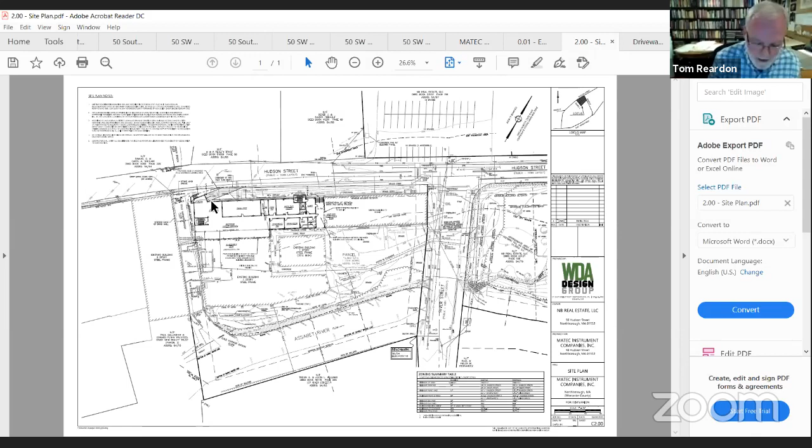What we're proposing to take down, if I can show you some photographs. Tom, I also have, I don't know if this is helpful. Or if you want to go through—there are 3 pages that you sent us.

Some viewers might not be familiar with the building. If I hold these up, the brick building is remaining, and the blue portion of the building is being demolished. The first floor is about 4 to 5 feet below grade at Hudson Street, so what you see from the street is 1.5 stories, but there's a 2.5 story section at the far end of the building. There's also a portion of the building that's 3 stories, about a third of the existing structure.

Are you able to use the annotate function in Zoom? It would be helpful if you could highlight or point out what you're talking about. At the top where it says view options, click annotate, or you can request remote control to use your mouse. He's not going to have the ability to do that unless Kathy gives him access.

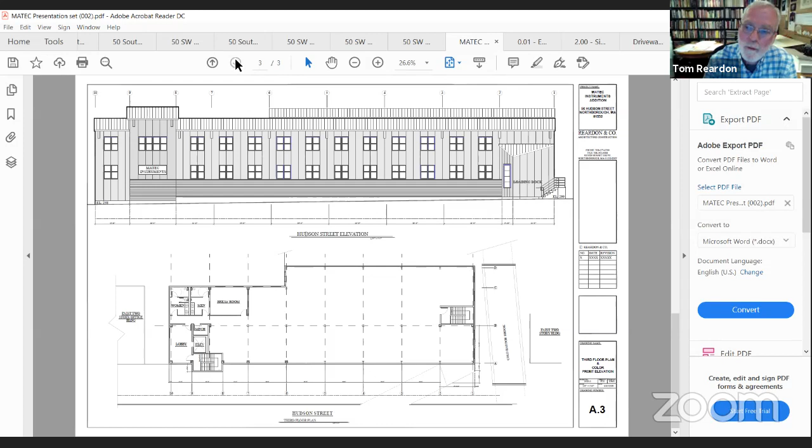Is the building required to be accessible on the exterior? Well, it is an accessible building, and we will have an elevator, and we're going to have handicap accessible restrooms on each floor, but it's accessible from the rear because the grade change takes - right, we're a half a flight down from the roadway. Right, okay, so we're coming in from what you'd consider the back.

So any questions for us?

Hi, Lisa Maselli. Just a quick question on the loading dock - now that you're putting it at an angle coming into the building, so it's easier to access, how much grass area are you losing there? Well, if you can see from this photograph, there's about a patch of 7 to 8 foot wide grass between the building and the sidewalk. So I don't know, 150 square feet, 200 square feet of grass.

Because if you're looking at the lower schematic at the angle that comes out, it looks like it would take at least 3 of those blocks for the vehicle to be able to back in and out. Is that correct if I'm looking at that? So it almost looks like it takes off half the grass?

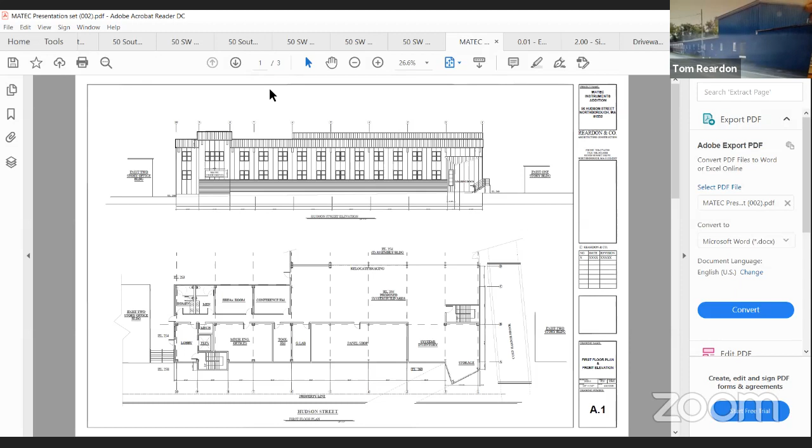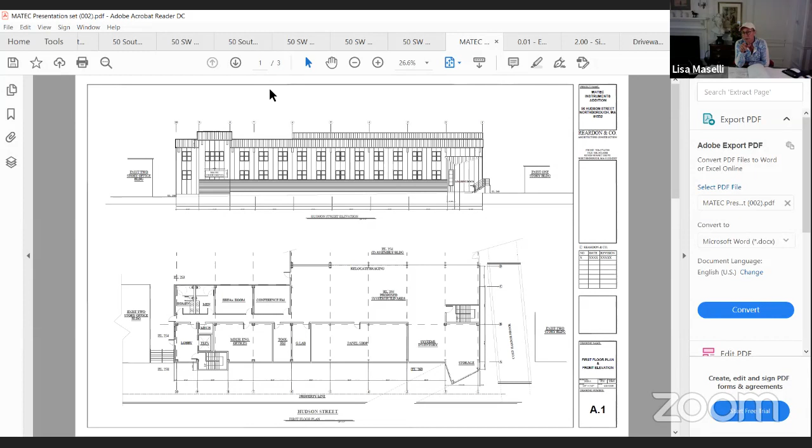Right, but that's straight on, where this is coming at an angle. So you don't lose - I mean, my only concern, the building is fine, but my concern is when you're walking on Hudson Street, that you don't have a lot of space to walk on that sidewalk. You almost rely a little bit on that grass area in case it fell over or something, you know what I'm saying? It's quite a busy street, and you have to cross over after this building, or in the middle of this building, to the other side by where the waterfall is.

Well, there's paving all the way from River Street till Cold Harbor Brook on this side, correct? Can we look at the existing site plan? Is that possible? Yep, thanks, you might have to zoom in to that area.

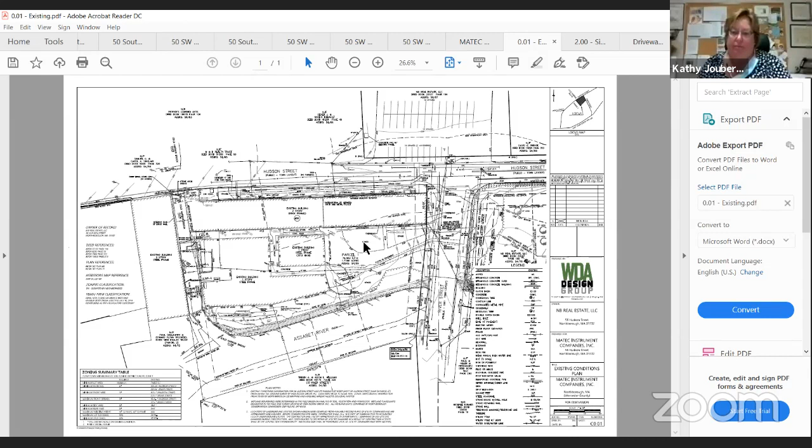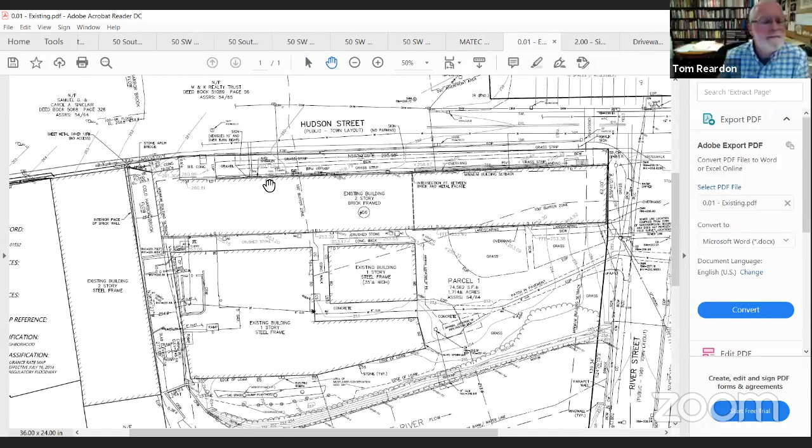Can you zoom in on that area, Kathy? On the left, yeah. Okay, right there. Yeah, wait a minute now. Oh. Now you're there, that's yeah, good. That's good. I can't get in any farther. I don't know why, but I can't get in any farther. That's okay, that's helpful. Yeah, so again, we're talking about right there.

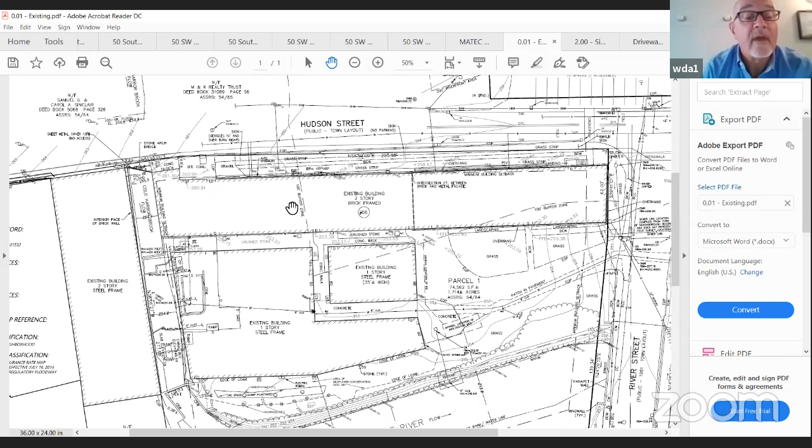Right, so from Cold Harbor Brook, it's paved from the edge of the Cold Harbor Brook. Then you have another section right in front of the loading dock, and then you have another gravel patch, and then before you get to the telephone pole, the sidewalk. So that's the area where we're proposing to put the new driveway.

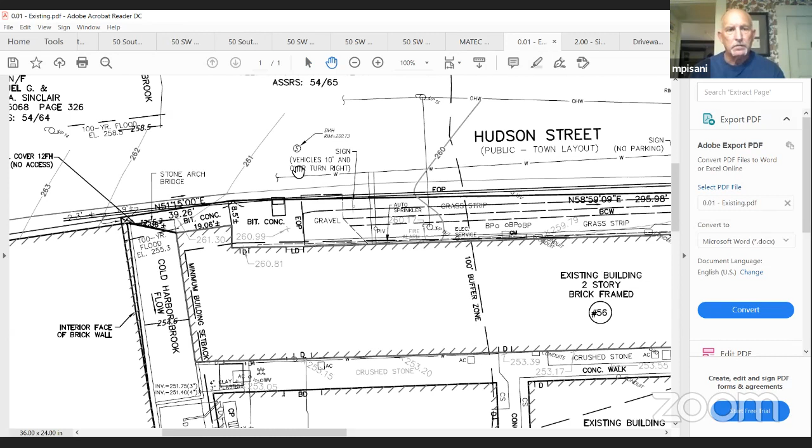Perfect. Now, can you kind of show me where the crosswalk is? Well, it's right at the edge of the roadway. There's, see the double line? That's a curb.

But where- Lisa, yes, I think in order for us to hear you, you're gonna have to move closer to your microphone. Let me see if I can - I'm not gonna be in the, but let me just let me look at it from here.

So if I'm looking at this map, I see 39.26 feet in the left-hand corner, it says bit concrete. I'm assuming that's from there, if you went west, that's where the crosswalk starts, from there over to the other side where the brook is, or where the waterfall is.

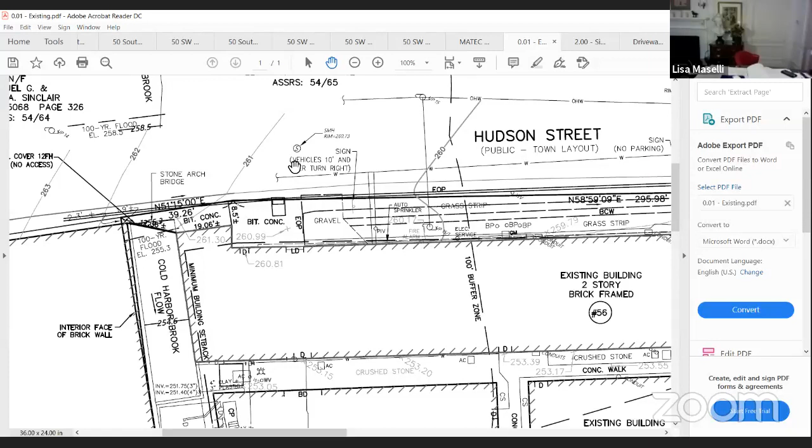The former waterfall - it's not there anymore. There's some concrete, but no waterfall. The pond is emptied, the pond is empty. Is that going to come back? No, the dam deteriorated.

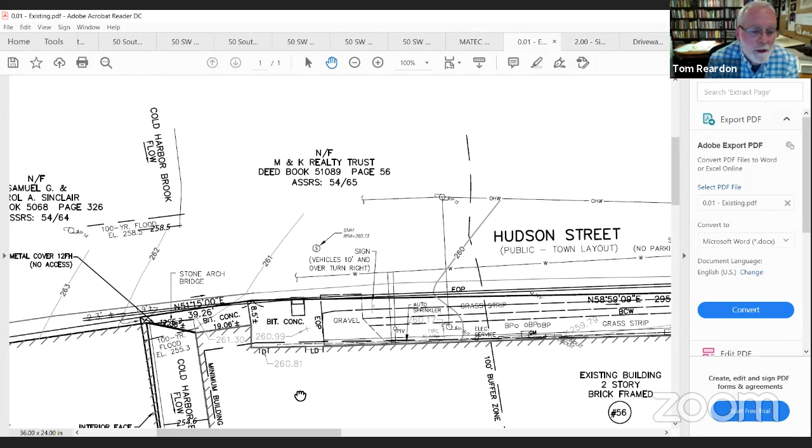So I've always wondered, how does the water go under the building and then take a 90-degree turn to go down to the other area? Well, there's a large concrete plank deck over Cold Harbor Brook that spans between the MATEC building and the building on the other side of the brook. You can see it on this drawing here, where it says invert 251.75 - that's the end of the concrete plank or cap.

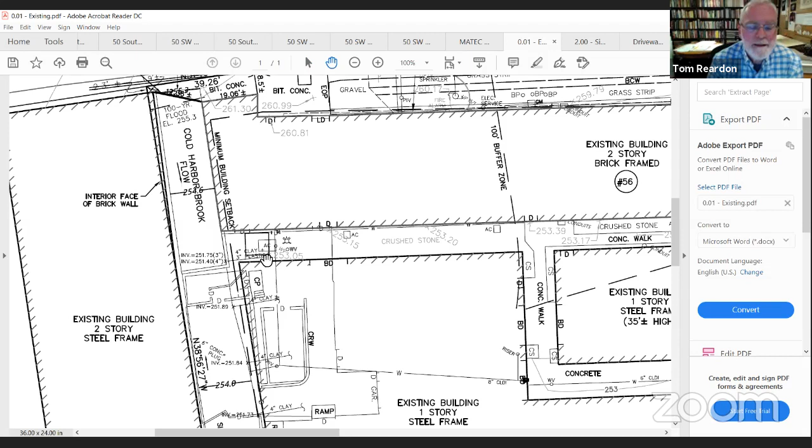But our new building is pulling away from that. Oh, so it won't be on top of it at all? No, we're pulling back about 15 to 20 feet, going to the right. Well, that's a good idea.

That's my only thought, that it's hard to walk there safely in the grass we have in front of the building. It's not a lot, but it's nice to have that buffer. Well, there will be more grass because we're eliminating two sections of bituminous concrete and one section of gravel. And you'll be able to put the sidewalk back, with a diagonal 30-foot long access to the new loading dock.

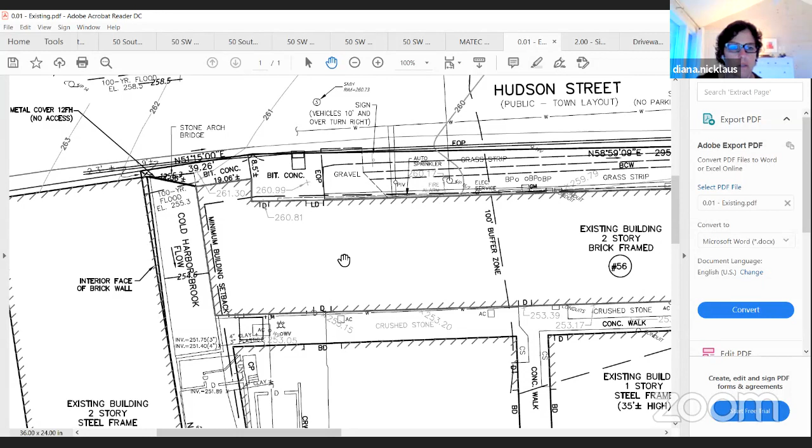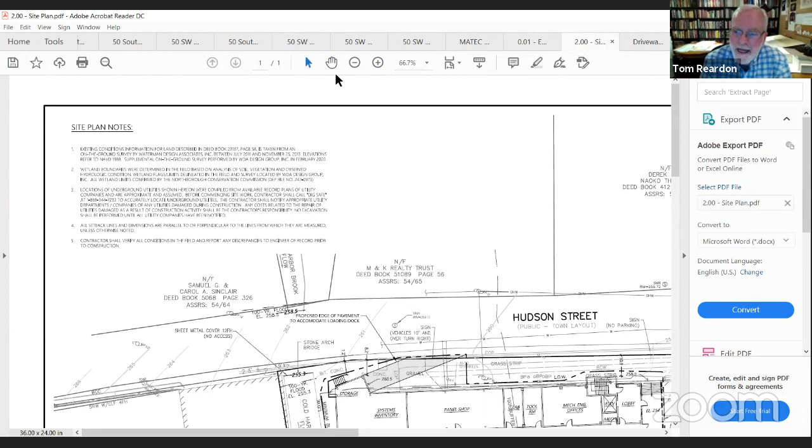I had another question about the loading dock area on your elevation. Is there some kind of bumper beneath the opening at the dock? Yeah, there'll probably be a rubber bumper. The loading dock floor is level with the second floor of the proposed building.

Tom, in your presentation, which was done well, you pointed out the lighting, any additional lighting you'd be having on the site. You pointed out that you're not going to have signage, or it's going to be limited signage right around one of the entry points. On the elevation, it showed a small signboard at the bump out on the right side where the stairwell is.

And we would obviously permit that as a sign permit. And that's the only one - a wall sign, no ground sign.

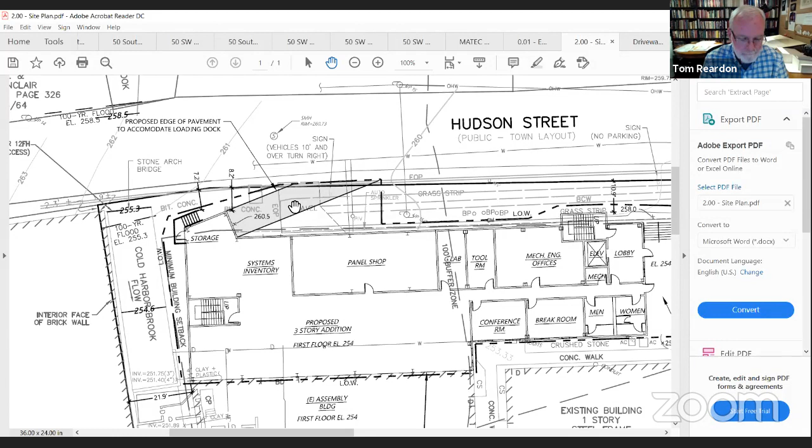Okay, Lisa, do you have any comments? It's fine, I like it, I don't think there's anything else we can do with what he's done with the roadside. So no, I think it's fine. I like the colors, and have at it. Lisa said she liked the colors, and she's good with it. Okay, and have at it, she said.

Okay, so Kathy, do we need to do a vote at all on this? Well, some indication, I'll send you a draft memo, but just a vote tonight, if you're ready, saying that you agree with the materials in the site plan as presented, something to that effect. My understanding is that you're not looking for them to come back to you. No, right, that's true.

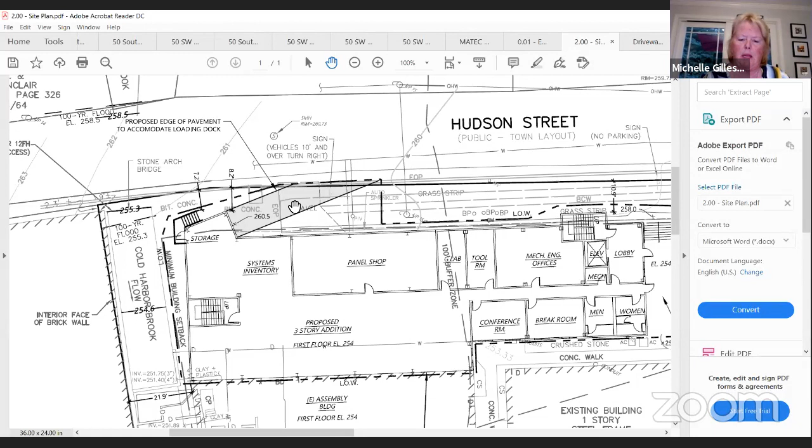Okay, so let's do a roll call vote, everyone can say yes or no. The vote will go that we all agree with the materials and site plans presented by the applicant here tonight. These will then be forwarded on to the ZBA as they're going before the ZBA in October. So having said that, Dave, do you agree? I agree. Approve? Approve. Thank you. Lisa?

Lisa agrees and approves. Diana? Agree, approve. And I agree and approve. So thank you to the applicant, we appreciate it.

It's going to be a good looking building. I like the colors. You're all set, on to your next board. Thank you very much.

So the time now is 6:50 p.m. and we have 50 Southwest Cutoff as our next applicant. That would be James Tatro, Tim Shea, and Nick Muskoff, is that correct? Okay, and they will be added on.

I do not know which one Mr. Shea is. I have four phones left and no identifying info on any of them. Once Nick connects, we can ask him which phone is Tim Shea's.

Hey Nick, can you unmute and let us know which phone number belongs to Tim Shea? Because we don't see his name, we just see phone numbers and don't know which one is Tim's. What's the last two numbers of his? 2131.

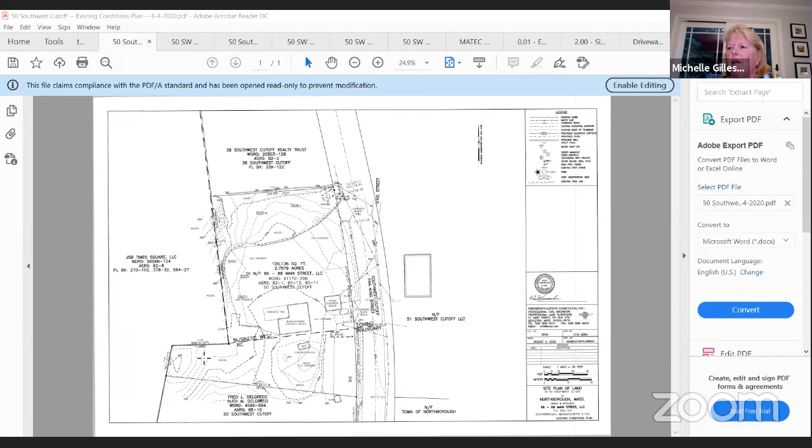And 531 seems to be twice, which seems to be James up there. Okay James, we can see your phone, but not your face, so if you want to start presenting.

Sure, yep. The application in front of you is for 50 Southwest Cutoff, which was formerly Del Greco Masonry Supply. The site is on the west side of Route 20, almost opposite where King Street's upper intersection meets it.

It is bordered to the north side by number 38 Southwest Cutoff, a commercial leasing space that the applicants also own. There is wooded land behind it, and you have to go about 600 feet behind this property to get to the homes on Buck Hill Road.

And to the south is a residential lot still owned by the Del Greco family. On the opposite side of the street is the Cromaro Tarpaulin Company. So that's to give you some idea of the context.

The site has been used by Del Greco, and part of it is paved, with a small structure up front and a bigger building in back where I guess they used to shape blocks and things.

Although most of the blocks and stuff is off the site, what the applicant wants to do is take advantage of the previous use to grandfather in the contractor yard use, and construct two buildings: one of 7,000 square feet, more northerly, and a larger one of 9,600 square feet facing the road. These two buildings would be used by contractor yard businesses - electrical, plumbers, people making tiles, things of this sort. That's their experience at their property in Sterling, which was built similarly.

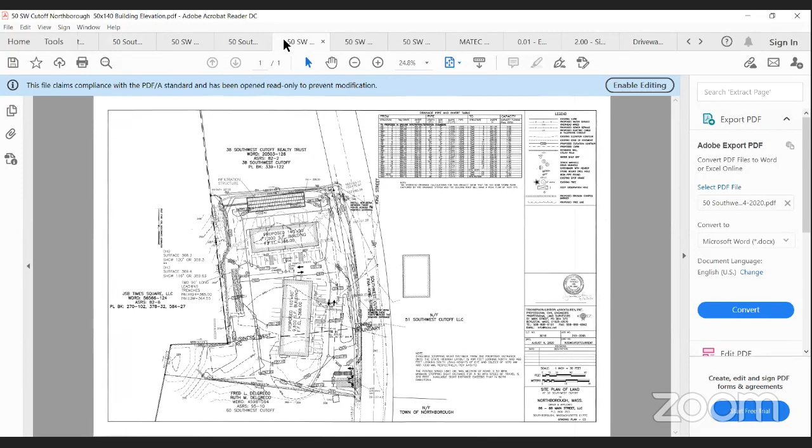If you look at the colored landscape plan, for the 7,000 square foot building, the more northerly of the two, we've got planting along the corner of the property and along Route 20 to shield the view of the back of that. For the larger building, the 9,600 square foot one, the back of it would be out of view. So the other primary focus of the landscaping is to shield that building and its activities from the Del Greco residents immediately to the south.

We're going to take the land in front of this, the rise off of the Route 20 curb, and flatten it out a little. It's mostly about a 2-to-1 slope, and we're going to flatten it out to 3-to-1. We're going to make most of that lawn.

I wanted to also point out that right now there are two entrances onto Route 20 from this property - one up by the north end of the frontage opposite King Street, and one on that landscaping plan, almost opposite the word 'cutoff' by Southwest Cutoff. We're going to close both of those up and move to a single ingress and egress point right at the south end of the frontage, because that gets us the best sight distance.

We're going to have 4 lights proposed on site, besides some wall packs in front of each door, front and back of each of these units.

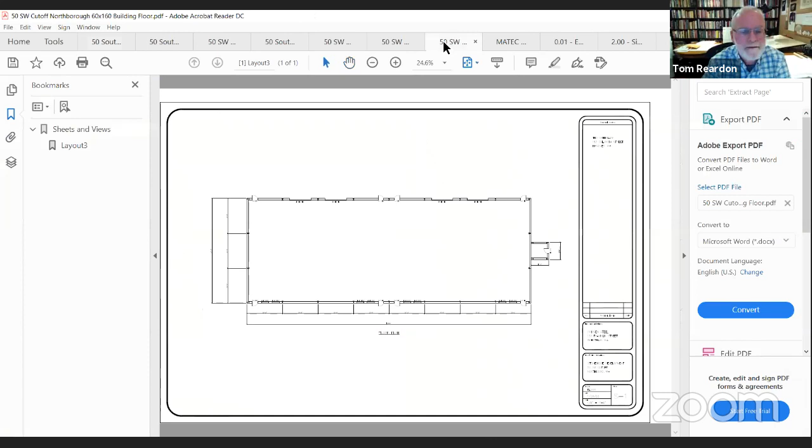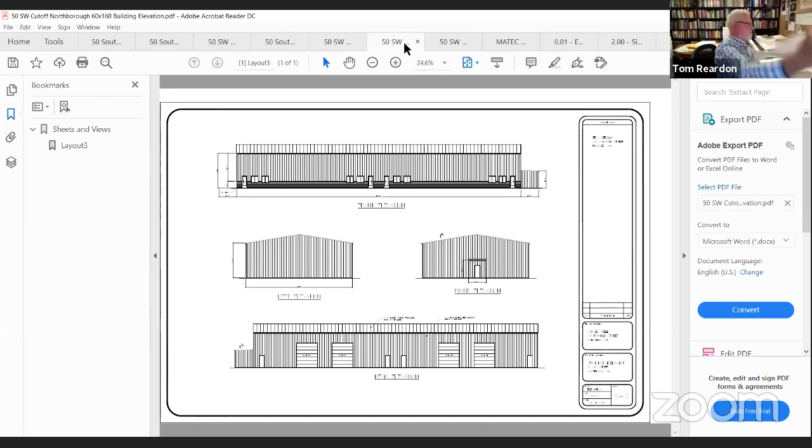Isn't it on there? On the floor plan, front elevation, on S2, yeah, that one right there. S2, we have two S2s. There's two buildings, one building is S1 and S2, and then a different building is also S1 and S2. I see, I get it, I had the wrong S2.

So those are the questions I have regarding the site plan. If anybody else, Diana? I would agree with your comments about that buffer with southwest cutoff. Are there a lot of trucks that would be coming in and out of that drive? I just wondered about the left-hand turn onto southwest cutoff as being a little tricky for trucks.

Well, if I may, that's why we made sure to move the entrance here. It's the single best spot for sight distance, because you can see a ways up towards the north. If you're sitting there waiting to turn, you can see. And in the other direction, a truck's driver would be much higher up, but we used the standard height of an object - the driver's eye is 42 inches high, the object is 51 inches high, in effect the roof line of a car. You could see, I believe it was Lexington Road coming in on the east side of Route 20, just downhill from here. I think you could see a vehicle there, which was enough for this 50-mile-an-hour speed. So it was pretty good.

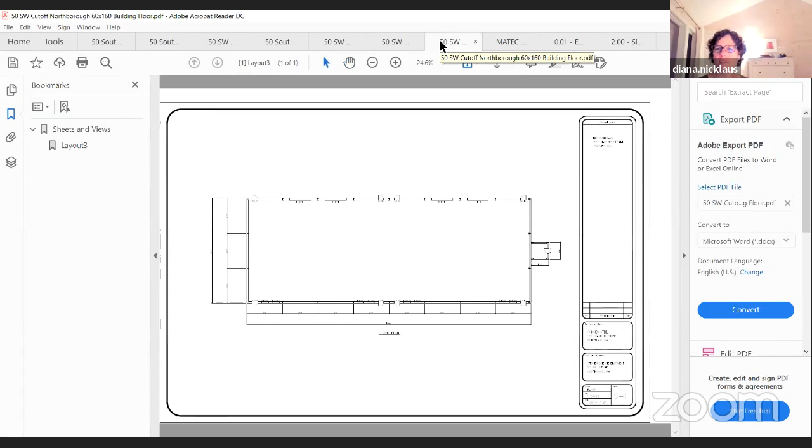Okay, so it sounds like you looked at that. I guess in terms of reviewing the site plan, it's helpful to see what the building floor plans are. And these are just steel drawings, right? Is it just literally wide open? They will be wide open spaces, yep. Like there's not even a restroom or anything in the building? No, they will have a single restroom in each unit. I mean, I guess I'm just accustomed to seeing floor plans when we're doing these design reviews, because I think it's important to understand the way the site is relating to the way the building functions.

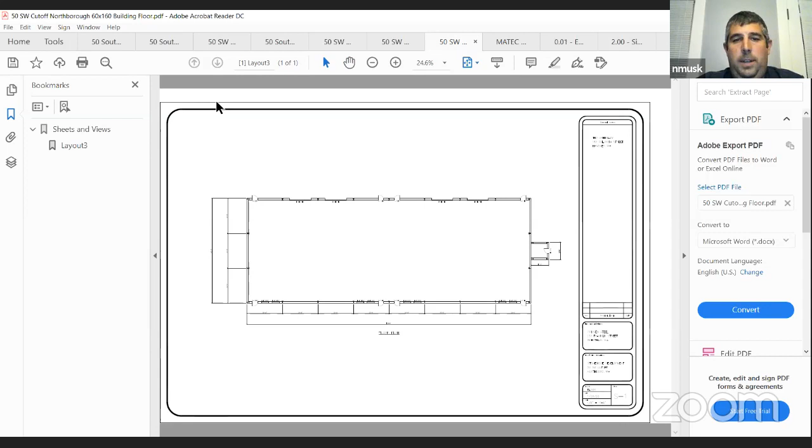The buildings will be designed to either be occupied by one tenant or up to 4 tenants per building. This is really just the building shell. And that's all you're going to permit it initially? It'll probably be permitted as 4 separate units, but this is our first design review meeting, so these are just our preliminary drawings. So you're going to show materials at a subsequent meeting? Material samples? Yes. Okay, that would be good.

So I think those were the only comments I had on the site plan. How about Dave? Okay, I got a lot. I agree with Tom, hands down. Coming into Northborough, you're coming past the Wegmans Plaza, you have the nice dental office, and then coming into this - the landscape design here needs a lot of work.

You're dealing with a large metal building in a sea of asphalt. The landscape that's been put in here needs a lot more thought because you're dealing with metal that gets hot in that sea of asphalt that gets incredibly hot. The plants have to try to survive after the first year in there in a very difficult environment. There has to be a lot of thought given to that, as well as long-term looks, since cars are going by here. We do need to kind of hide this without a doubt. Right now it's kind of like, hey, we have a splash of color or planting here, splash here, a couple in a row over here.

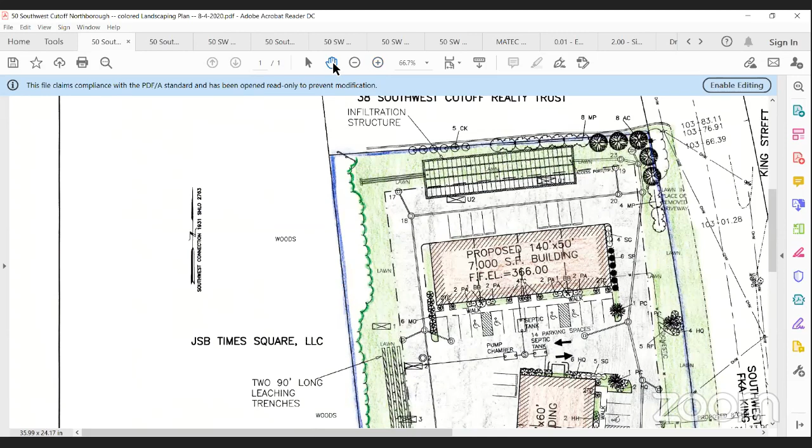Can I ask, I'm a little confused about something you just said - you mentioned about the left-hand side on the smaller building, and I'm not sure what you were saying there. There's a planting on the left-hand side. Looking at it on the screen, what do you have, like a bunch of MOs? Mock orange. Yeah. And after the mock orange, what's going on there in that corner, the rest of the corner around the building? Doesn't make sense. Well, that once you've gone that far around the building, it can only be seen if you're driving - can't be seen from off-site, essentially.

Hey Dave, what about shifting the landscaping budget away from the buildings down along the southwest cutoff, the front? Yeah, exactly. I mean, if these are going to cook next to the building, get them in the front. Take all that stuff and put it along the lawn area. Put the money there, change the plants, get them to the front. Something along the front, the whole entire along the southwest cutoff - that's where it has to go. Because I hate to see, you know, you got contractors, you're gonna get cigarette butts in there, you're gonna get everything else in there. Stuff is gonna fry. And I'm sure you're not gonna do any irrigation in there, are you?

I don't believe we plan on doing any irrigation. Yeah, I mean, this stuff's gonna cook.

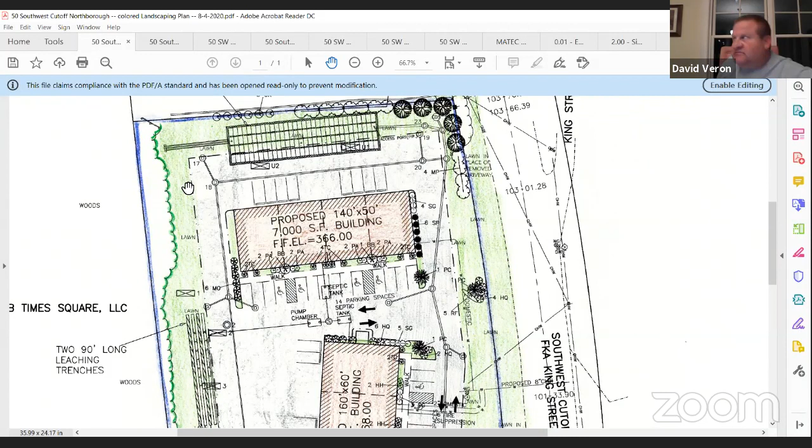So, David, what's the mature height of the white fir they're proposing? Depending on the variety, but those will get pretty big. You're talking 30 feet or more. Yes, 30 feet or more, depending. And they start out at 2 inches. How long does it take to get that high?

Some time. Way past my time, right? That's mine too.

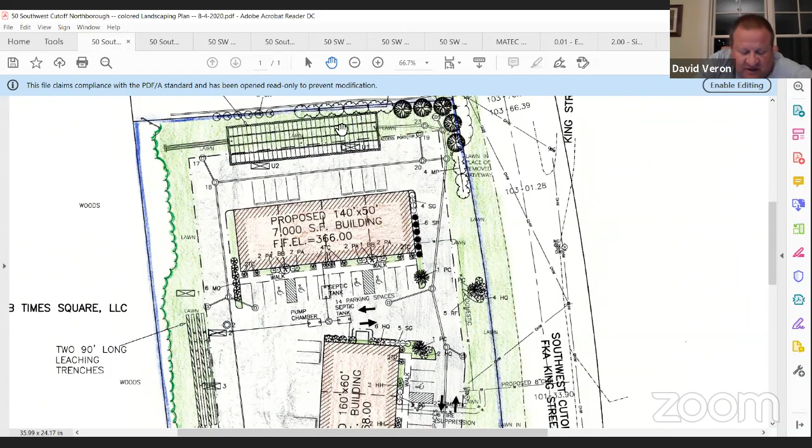All right, there's a lot of, this is going back to the drawing board, unfortunately, in my opinion. This all has to go back. This needs a lot of thought. That whole berm for the southwest cutoff needs to be really reworked. I feel this has to get pretty well hidden, because as a contractor, you look at those metal buildings, they're nothing great to look at. You do the front of them, and I think they should be hidden from the southwest cutoff as much as possible. Again, that's just my opinion.

Okay, thank you. Lisa? Can you hear me all right if I speak this loudly? Not really, I think you need to come closer to your microphone. Okay, girls and boys, here we go. Now can you hear me? No. Wow, I'm like 2 feet away from the computer.

There is a lot of going back to the drawing board. I saw photographs of superimposed buildings. Is that correct? They were white?

Oh yeah, let me see if I can find those, Lisa. Those were buildings that, well, I'll let Nick speak to that, but they were from another site. It was a project that we just finished in July in Sterling. Yeah, let me see if I can find those.

Go ahead, Lisa, if you want to talk while I look. So if you look down at the lower part where the line changes from Business West to RC, and the building goes through that line. What you're doing is you're trying, with a pre-existing contractor's yard, to keep that there, but when you're using industrial use and it's abutting residential, you're gonna have a 50-foot buffer, I thought. So what happens with that in this case?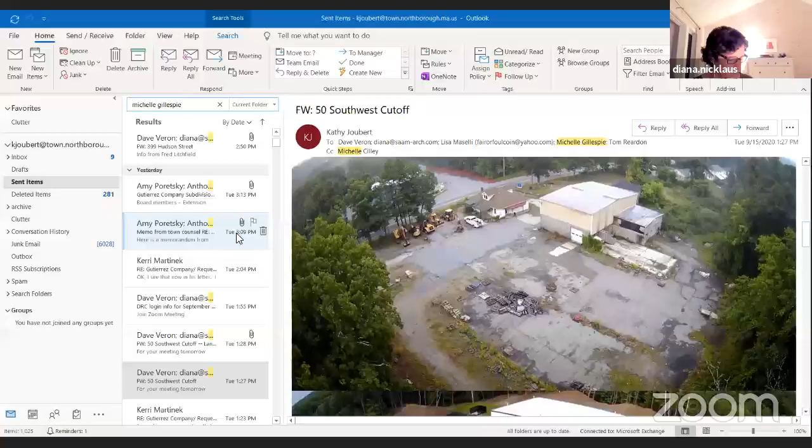I'll just say, if you look at Google Earth and look at the view, it would show you the trees—there are a lot on that end of the site. And relative to Lisa's comment, can people see that tree line?

Is the picture up now? Okay, I'm just going to scroll through this. Nick, why don't you describe this as I scroll through it? That top photo is existing conditions at Del Greco's as we speak. To the left are the trees, that's north towards 38 Southwest Cutoff. This is looking straight across Route 20 towards the Canvas Company, which is right here. As you scroll down...

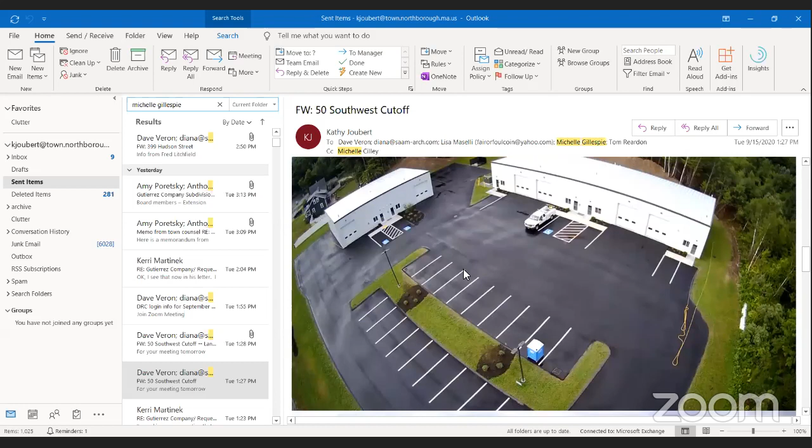This is a project we just completed at 20 Pratt's Junction Road in Sterling. The building to the right is a 7,000 square foot building with the same footprint we propose for our 7,000 square foot building. The building to the left is 4,000 square feet, just divided into 2 units. Currently, this project is completely leased out with 6 tenants.

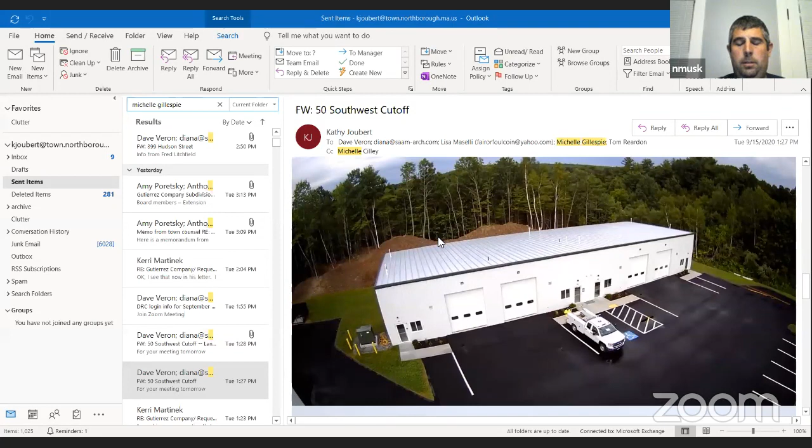We have—Nick, I think you should note that these buildings are different in that they have garage doors in the front, whereas the ones you're proposing at 50 Southwest Cutoff only have them in the back. Correct. The way our site worked in Sterling, we really couldn't put the doors in the back of the buildings, so they face the front, the road. We thought at 50 Southwest Cutoff it would be better to put the overhead doors on the back of the building.

This picture we're looking at is one we completed last year at 110 Pratt Junction Road in Sterling. This is a 4,200 square foot building, single use, just one tenant. We propose to do a similar type building, same color scheme, white with dark green trim, same type of windows, and same type of overhead doors.

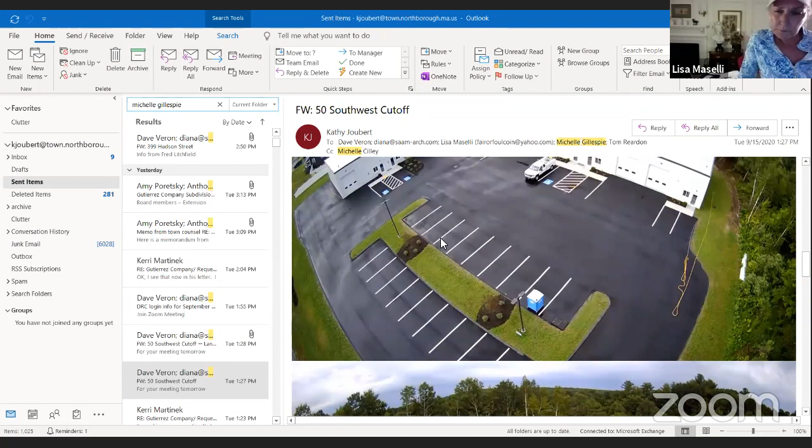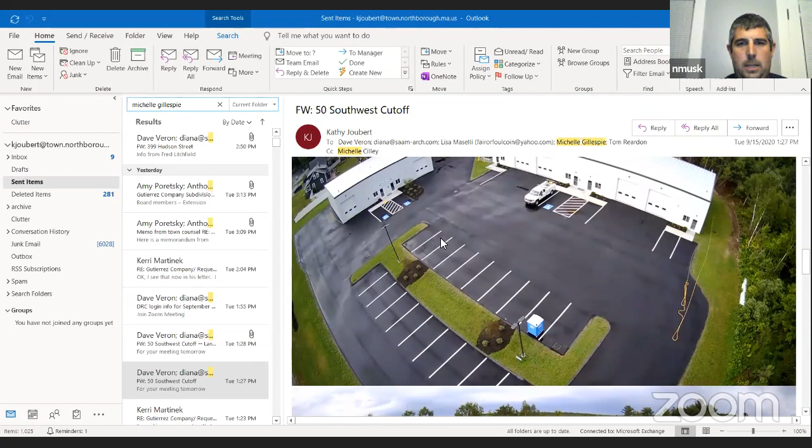I just want to note, if you take a look at that, you've just got a concrete apron going right up, no landscape around it. Coming from me, it just looked relatively better than trying to put a ton of plants around it. You can see in these photos we just have small landscape beds in front of these doors, a minimal amount of mulch—probably about 5 foot by 10 foot, with 5 to 6 little plants or shrubs in each one. Not much. More of the landscaping was done out towards the road. I don't really think you can see that on any of these photos.

Nick, is each roof going to be flat? So these buildings we did in Sterling have a single pitch roof with all the water going to the back of the buildings. In Northborough, we propose to do a double pitch, a gable style roof, pitching both front and back. That way it allows us to get a little more trim detail on the buildings, so there'll be more color contrast, and it won't look like such a big box sitting there.

So you're going to do more to make it less of a box look, with more moldings and trims like that—like we'd seen one done near 290 with a lot of that detail. So when you come back next time, you'll have different materials and show us a different potential face, at least the one that faces the street.

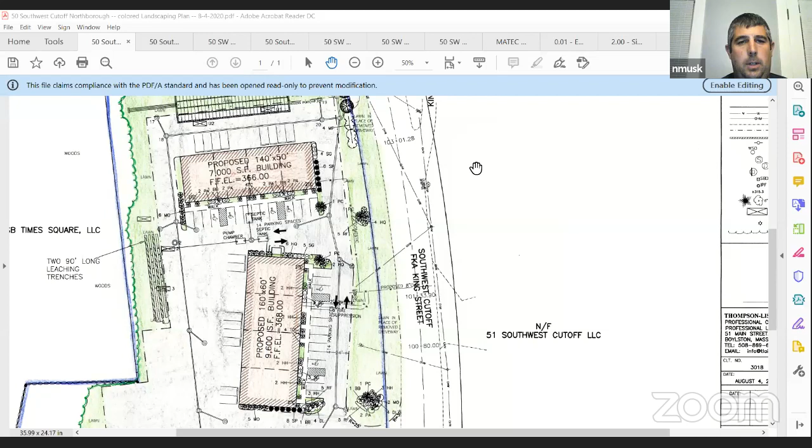On these buildings, on the front elevation, we plan on doing a strip of vinyl siding on the bottom 4 feet to try to break up the front of the buildings. Will you do more around the windows and doors, or is that the only difference? That would be the only difference.

Well, I am an artist. I'd like to see a little bit more to it, but I'll let the rest of you chat it out. I'm going to go sit back down at my desk. Thank you.

Okay, so I think the consensus is that we have some more work to do on the site plan, especially regarding either hiding the building through landscape or things you could do with the building itself. Diana and Tom, since you're our architects, do you think your message got across about the detail of the building, or do you want to go into more specifics now?

Well, I would recommend that, like Nick's intent, is to break up the elevations facing the southwest cutoff. So the larger building would be the front elevation, and the smaller building would be a gable end, not the front. So those were the two elevations we'd like to get some help with.

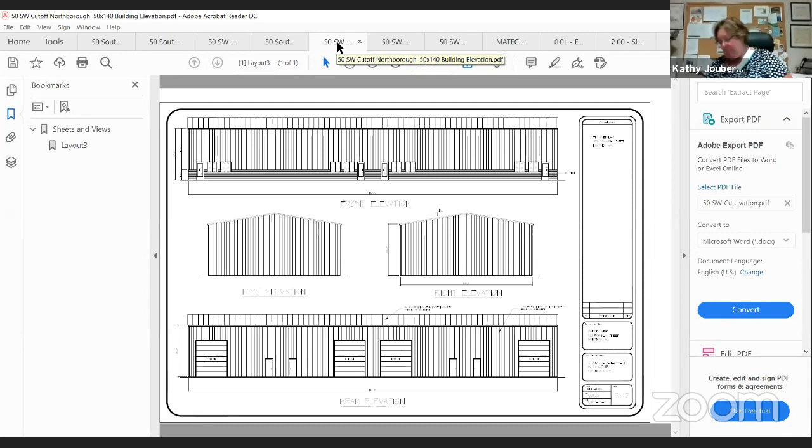Okay, I think we'll wait until Diana's technical difficulties are resolved before she can come back on. Why don't we just, because obviously I think you guys are going to have to come back again. Are you going through the ZBA at the end of October? Is that the board that's permitting it, the ZBA or the planning board? The ZBA, and it's scheduled for the end of September, September 29th. Okay, all right.

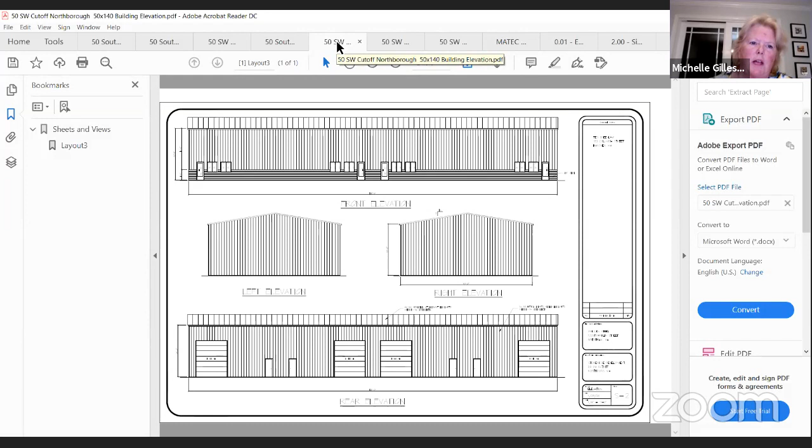So since we have Dave here, do you want to talk a little bit? Does everyone feel like they've gotten their message across about the landscape, to come back with a different landscape design? We understand that. Okay, and then lighting, the board has already asked to come back with a little bit of changes with regard to your front and side elevations. So do you have a lighting plan at all here?

We do, and we were trying to be as modest as possible with the lighting. There's only 4 lights: one by the entrance, one at the very westmost bit of pavement behind the larger building, if you're standing on Route 20, the back left corner, way back there. One behind the smaller building, and one sort of in the area between them.

Everything else is just wall packs on the fronts and backs of the building. So do you have something showing the wall packs?

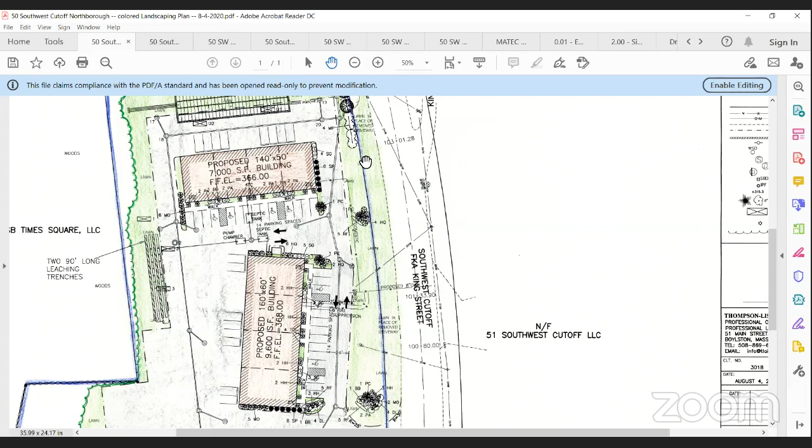Yeah, we did have the spec on the lighting plan in the site plans. What I don't have on the screen here for everybody is I didn't load up the application for tonight, which has the full set of site plans, so I'll do that for the next meeting. The wall pack, there were eight of two different kinds, each of Lithonia lighting. It's 120 watt, am I getting that right? So it is in the package that was emailed to everyone and mailed, but I just don't have it up, I don't have it ready out of my computer to put up here tonight.

Again to the same point, trying to be really modest with it. The lighting photometric plan was to show we're not going to have spillage over onto the other properties.

Jim, with regards to, do we have a site plan that shows the pole lights? Yes, they are shown on it. Which plan is the best one? In the site plan packet that was, I think, both emailed and mailed to everyone. I think it should be in there. I've been going through it. I see the wall packs on the photometric drawing, but I don't see the pole lights.

Unfortunately, I agree, it's hard to pick out without it being in color. But there is one immediately to the south of the entrance, is that something you can have for the next meeting? Oh sure, okay, absolutely, absolutely, Kathy.

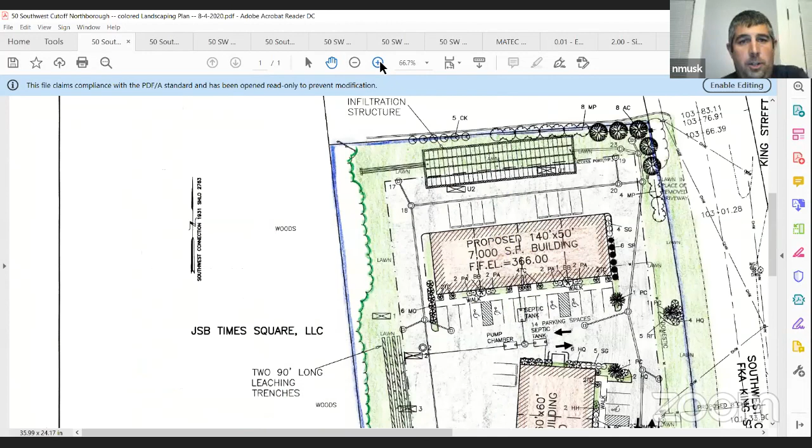The next thing is with signage, is there any signage on the building? Nick, you want to touch on that? I don't think there's any intention at this point to have anything besides the sign out by the road, which is actually surrounded by plantings there, so it's hard to see, but it's just to the south side of that entrance. Most likely it would just be signage on the actual front door of each tenant space.

Okay, but will there be a sign on the Southwest Cutoff that's just going to have the address? It's not going to list all your tenants, right? No, we'll have a spot for each tenant name on the sign out at the street.

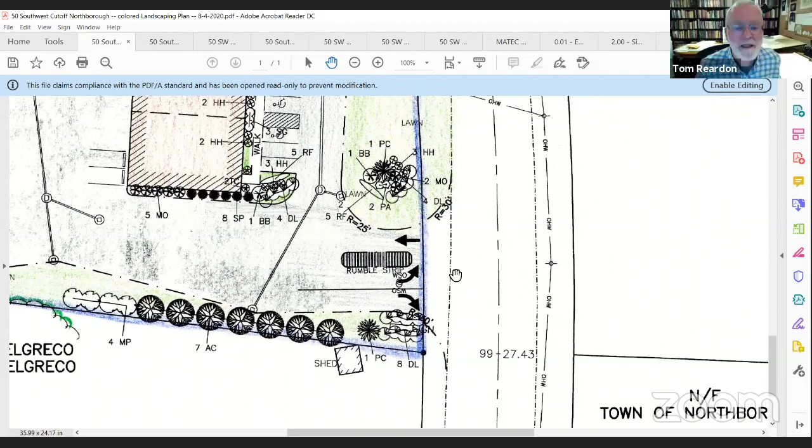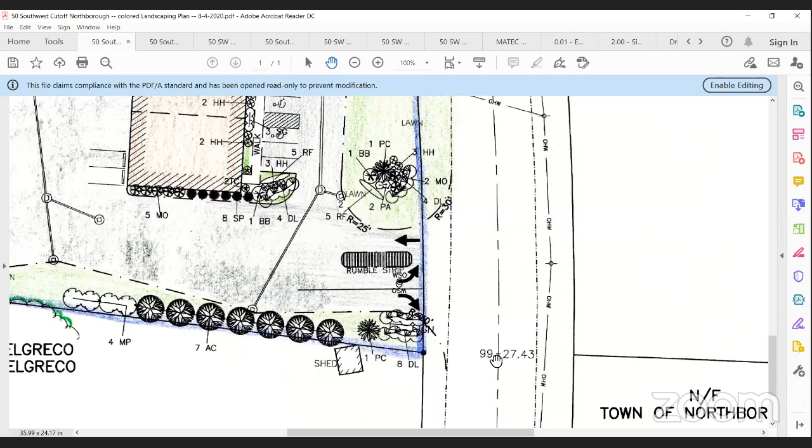Where is that sign going? I don't see it on the site plan. If you look right where it's on the... and by the way, when Kathy switched to this view, all of a sudden my screen came alive, so somehow. What's showing there right now, you see in the road, you see the station 99 plus 27.43. If you look just at the edge of the site, beside that, you can see the word sign, and it's hard to see. Oh yeah, oh I see it, it's buried, yeah, okay.

So your sign is going to be externally lit, and if you have six tenants, all six tenants will be listed on the sign as well as the address, correct? Correct. Okay, all righty.

Does anyone have any feedback on the sign, or how about the colors? Are you doing anything other than white? Is it white in a different color, or is it just white? White with like a hunter green as trim for the buildings. Dark green, how about dark green buildings? To complement your blue building? No, to blend into the trees in the background. Oh, the camouflage, yeah exactly.

Well, the blue building we just approved went to gray, it's now light gray. That's right, we try to tone it down here. Yeah, can you hear?

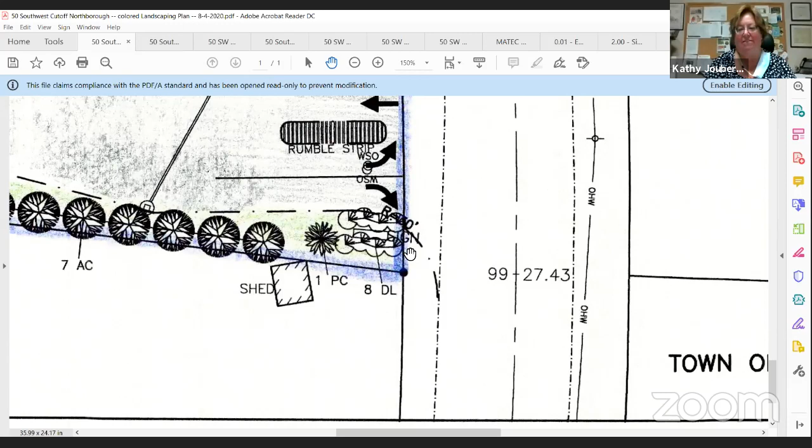We can hear you, how about Diana, you're coming back online, okay. No, you're all choppy, Diana. We'll have to get you feedback for the next meeting because you're really breaking up when you're speaking.

Okay, Lisa or Dave, do you have any comments about the signage or the design colors? Tom Reardon just requested green, or just bring your palette of colors that's available through the metal building manufacturer. Yep, go with Tom, I'm good.

Signage, where's a sample of what the sign looks like, what the lettering is, what the height is, what the stanchions are? Do we have one of those?

Not at this time, no. Bringing that up - well, he has to fill out there's a sign bylaw and there's specifics for each one. Are you asking for any variances or anything special about signage from the ZBA?

We don't anticipate asking for a variance. So you're just going to have the normal signage whatever everybody has along that street gets, that's what you'll do? Yep. This, again, sort of to Michelle, to your and Tom's point about the nature of this business - this isn't something where you try and have flashing lights and attract people in that way. It's more like somebody's looking for the address, where's 50, oh there it is, and get them to turn. So we're not looking for a huge light or special lighting setup.

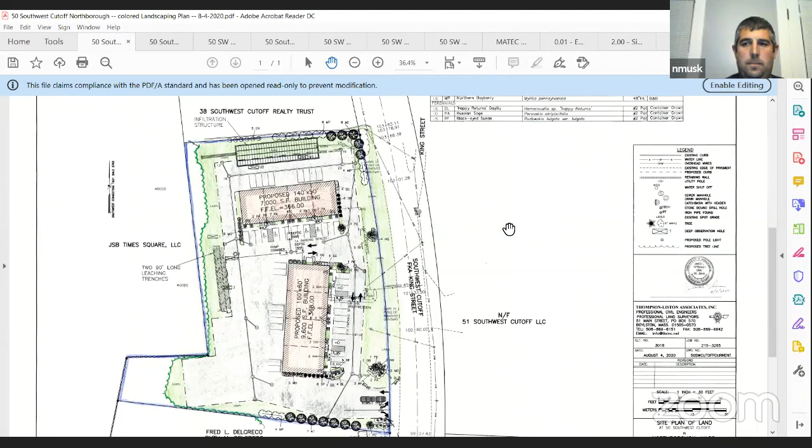So at the next meeting, it's primarily Kathy's gonna provide the signage or the light material, the information on the light to us for the next meeting, correct? Yeah, James will provide like a colored version that's easier for you to see, and we'll have it up on the screen.

Okay, will do Kathy, and then signage, we've already discussed, but if there's anything you need to provide for us, if you could do that for the next meeting. It sounds like you've got a lot of work on landscape, and Dave Veron is our landscape person here, so I guess he's already given you feedback, and if you wanted to send something to Kathy to get Dave's feedback on prior to the meeting, I don't know if that's okay, but if you could help with that.

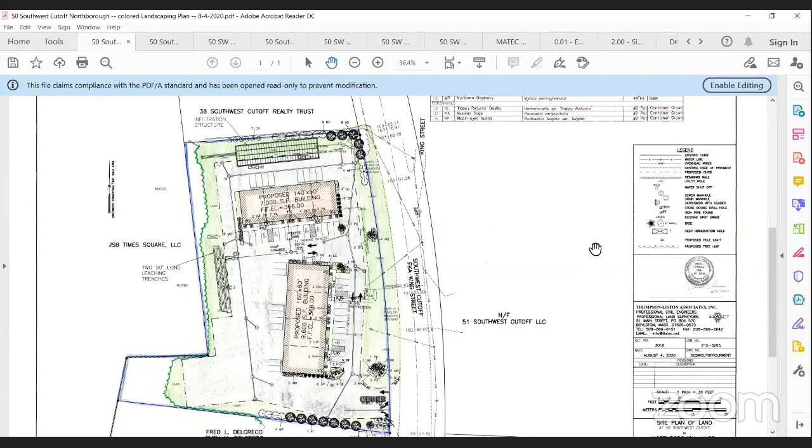Okay, and then you're going to come back and work on the building as Tom and Diana gave you recommendations for, and present some different ideas to us at the next meeting. Yep, okay, so I think we're all set. So Michelle, we just have to figure out a next meeting.

For the design review committee, I think from the emails a month or so ago, people were good with switching to an evening meeting, or do you want to switch, whatever you want to do. It's just that we had to definitely pick a date tonight to continue this discussion, and then it's subject to me having an available license and a host for the meeting. And this applicant is before the zoning board of appeals on the 29th, so I don't know if it's something you want to try to meet again in a week, or I don't even know if that's possible for the applicant.

Evenings work for me, I can do an evening. That's fine. Will the applicant be available on the 23rd?

Michelle, I'm going to make a recommendation, you should stop your video. I think you're having bandwidth issues, and if you stop your video, your audio will come through much better. Okay, hold on.

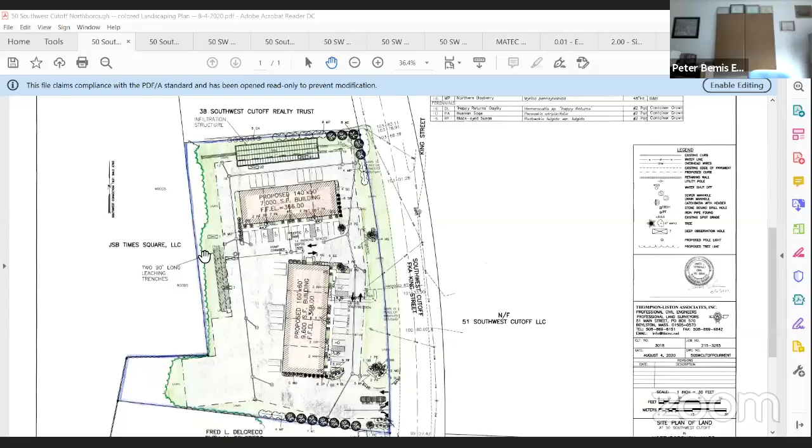And so Kathy, you're gonna bring up the drawings for that? Yeah.

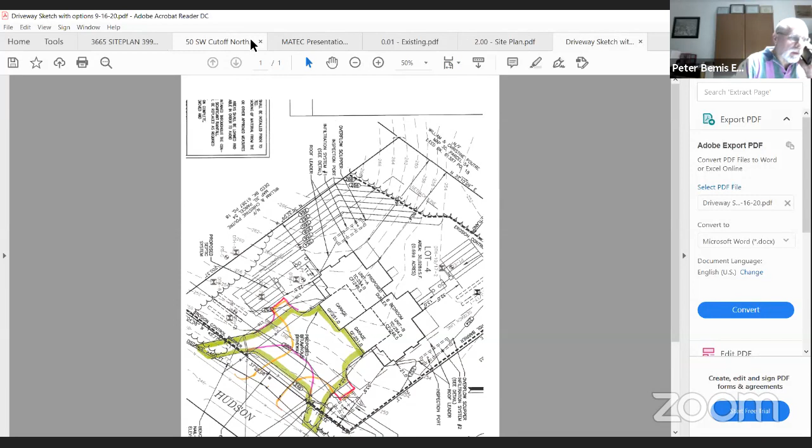Hi, so are you on the 148 extension? You're okay, you're in, but you're probably staying on mute. Well, why don't I stay on the phone if you have something you want to raise, and then we'll just try to advance this. Okay, so I have Bill on my cell phone, and he's the 148, so I think he can hear us, but he's unable to unmute himself at the moment. All right, well, we're all set and you can start presenting. Thank you very much.

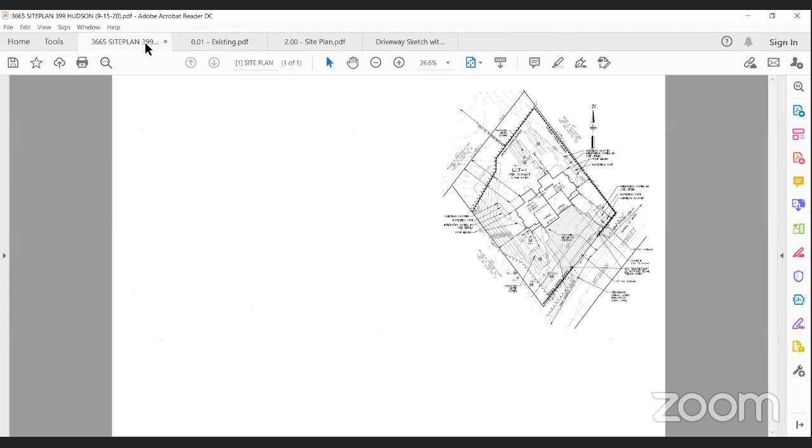Okay, so let's start with the site plan. We're on Hudson Street, the address number is 399, and the proposal is a duplex on a 30,000 square foot lot. Soil absorption systems have been approved by the Board of Health.

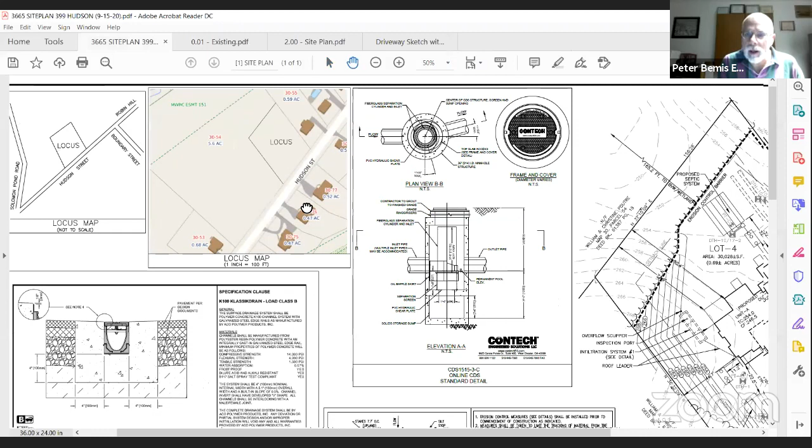As you can see there, that's a Contech unit. I can go bigger, Peter. I think zoom in, that's better. Let's do that.

So off to the right is the plan. The lot is on the north side of Hudson Street, and again, soil absorption systems for each of the units are approved.

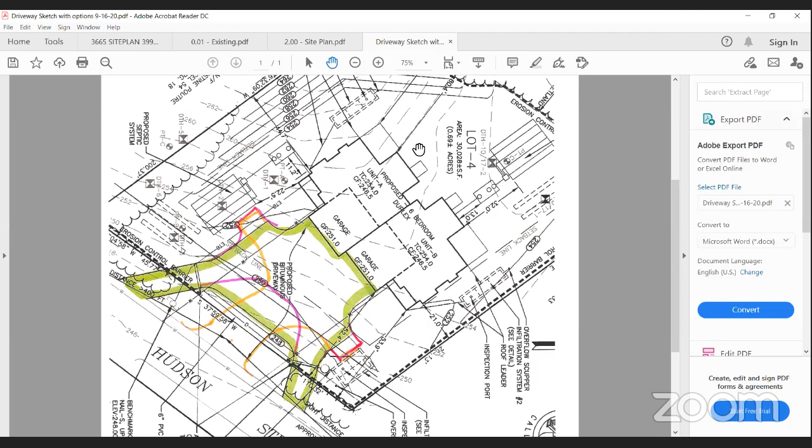This proposal, the way it's drawn, has the driveway across the front coming in as one larger area. You can see that we did suggest coming in with a single driveway and then circulating through. Kath had brought up an exhibit that Fred had come back with, and I'm open to that as well. The rotation's a little different than our site plan currently, the way Kath has it, but you can see the two legs of the driveway coming in. It just feels better than being one larger opening at Hudson Street from our perspective. And then we'll have turnouts on either side for each garage.

The stormwater management - as I was saying, the entire site will be infiltrated. Roof water is collected and will be put into an infiltrator system. The driveway water will also be collected, treated, and then infiltrated to the ground. Those details are there to the left side of the sheet.

On the right side is a zoning recap for the project. The site is allowed 4,500 square feet of impervious area to direct discharge. We're trying to infiltrate 100% of it. The small tails of each driveway that come out to Hudson Street would not be captured, but the proposal does infiltrate almost 100% of the stormwater for the site, even though more than half of it could direct discharge by your zoning bylaw. The architectural plan - did that one come in, Kath?

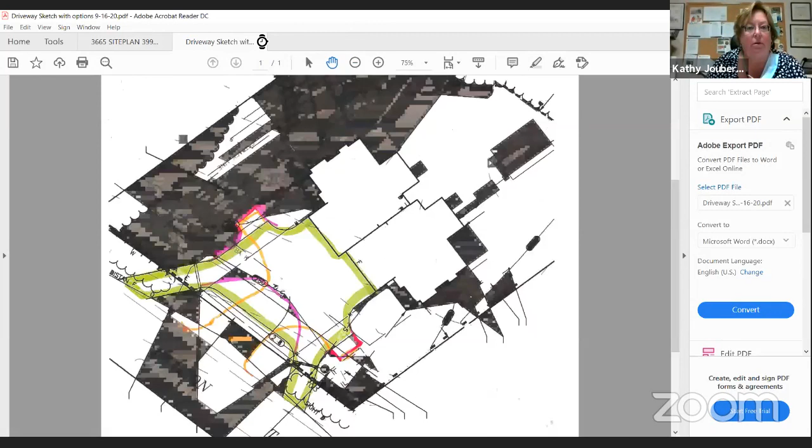Let me - oh, that's not you. No, it's not you. I have - and then there was a photo. The photo could work, the one that I sent this afternoon that was suggested we provide. But do you have that? Let me find it. Keep talking, let me find it.

Okay, so architecturally it's kind of a craftsman style duplex. It's got a great street appearance. This residence is actually being constructed right now in Southborough at 28 Boston Road, and they put up 2 of those on the same property, and then did 2 singles next to it. So it's basically 6 units on a property near St. Anne's Church. The units are 3 bedrooms each. They have some appointments in them that I think are going to be attractive for at-home folks, which seems to be what everybody's looking for today in that marketplace. They have the ability to have an office, exercise room, that sort of thing. But it's a good looking plan, and we did provide a picture today as well to show you what that looks like built.

Did you get to find it, Kath? There we go, great. Okay, there are architectural plans that accompanied this and were part of your packets, no doubt. I don't have those up on the screen, but everybody does have those, Peter.

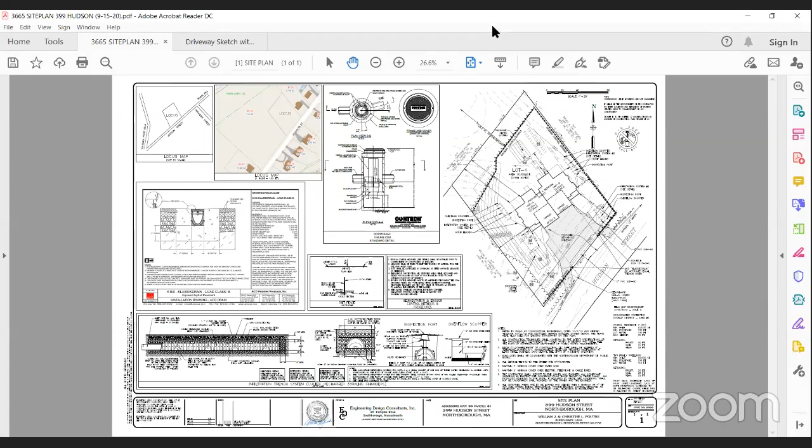Diane, we've lost you again. Okay, you can't hear me now? Oh no, now you're back.

I was just gonna say, the garage doors look different. Is that something that is intentional, or are they just different for some reason? I don't know. From the architectural, I mean, they're carriage house doors, and I anticipate they'll be doing carriage house doors because that's in keeping with the craftsman style we're trying to achieve here. Well, on the drawings we have, they don't look like that.

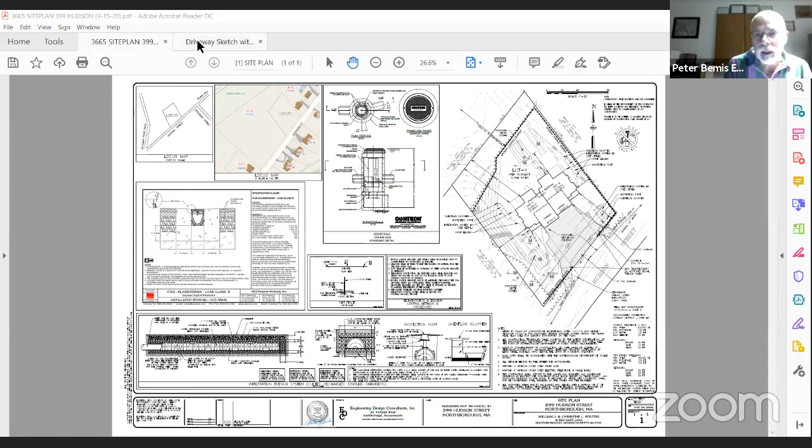So I agree. I think it's a nice design and a nice look. Is there only one driveway going in, or is there one shared driveway? Yeah, this project here, this is a loop project, and there are 6 total units. The one for 399, we'd like to do a circular driveway, if you will, so there'd be 2 entry points. It just looks and feels better. There'll be a nice grass island in the front of the building. So that gives us the opportunity to have some separation instead of just having a driveway going straight into the house.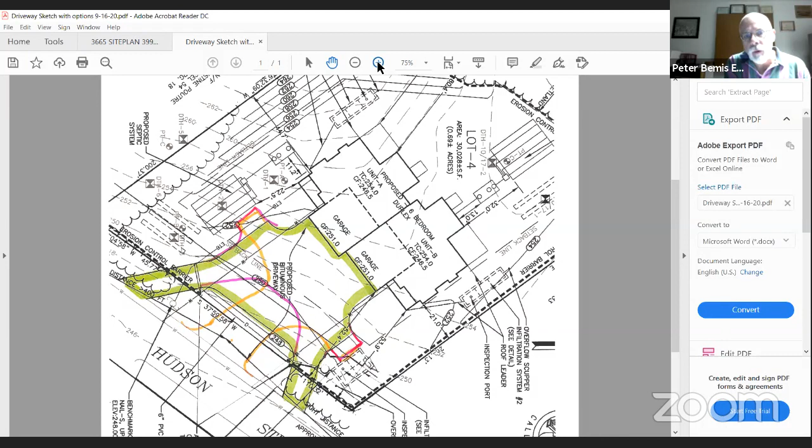Fred and I were kind of going back and forth with some things, but unfortunately for timing, I didn't get to communicate with him until today. But we would probably be following the purple line, if you will, that's on here that Fred added versus the yellow. So we follow the green as it goes around the house, but then you would track the purple line, goes back to green out to Hudson Street, and track green back, but then go to purple. So you can see that we're pulling the driveway further away from Hudson Street.

But Peter, I think we need to clarify that, because I think Fred's—if anybody can pull up the email that I sent you that came from Fred. I have it, Kath. I don't mind reading it to you if you need to. Okay, because isn't he talking about this? Well, so Fred said one or the other. I mean, he had said the single driveway, but let me just read it. I'll use his words.

Okay, so: attached is the sketch we spoke about. Hello, Peter, attached is the sketch we spoke about. The yellow line was my original thought, with one point of access onto Hudson Street, and the purple line is the second option. I realize we do not have any regulations preventing people from having 2 driveway openings, but I always prefer a single driveway opening if people are not required to back out onto a public way. I'm sending this email to Kathy Joubert, who will be sharing my thoughts with the design review committee this evening. Fred.

And I just said to Fred that I did speak with the builder. He felt pretty strongly that he'd like to have a circular driveway, and he'd like to have that ability to have this entry from the street that's kind of coming from the 2 sides and having that green space there. It just feels better to us. I think it'll be much more attractive at the end of the day. And with these backups—right, so if you look at the yellow, there'd be these really long backups coming off of the center driveway, whereas they'll just feather in nicer to the single driveways on either side.

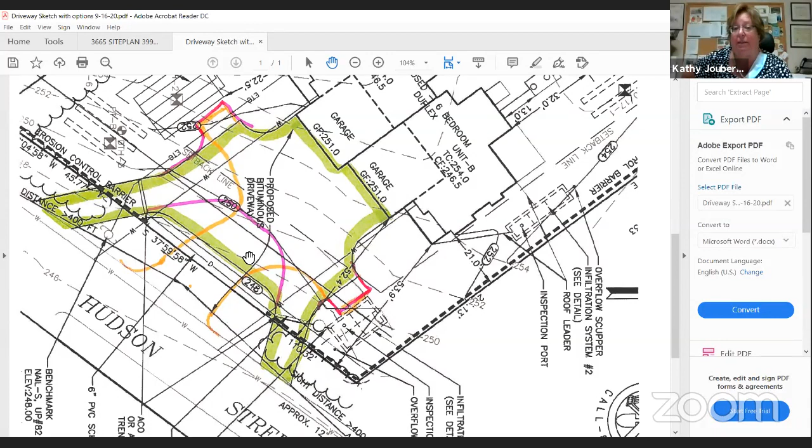Yeah, I mean, it sounds like—I don't want to put words in your mouth—but it sounds like everyone is good with the design of the duplex and is good with this sketch that Peter and Fred have talked about. And maybe there's just a way to memorialize that in a memo, as opposed to having the applicant come back to you.

I'm okay with that, the lighting on your building looked fine. Our design standards haven't been completed yet, so we're limited on what we can ask an applicant for a duplex. I don't know how the board feels, but you seem to have the appropriate lighting shown in your photo. I like where your driveway is with the purple. It seems like all three of us agree with the site of the building and how it looks.

As well as Diana. Did we lose Diana? We might have lost Diana. I'm not seeing her on here anymore. Yes, she dropped out. But Diana liked the site and the way the building was designed.

So I agree with you. I don't know how the other two board members feel, but if you want to put a letter together so you have something to present to the ZBA on the 29th, and then again to the planning board on the 6th. Lisa agrees, and Dave agrees as well.

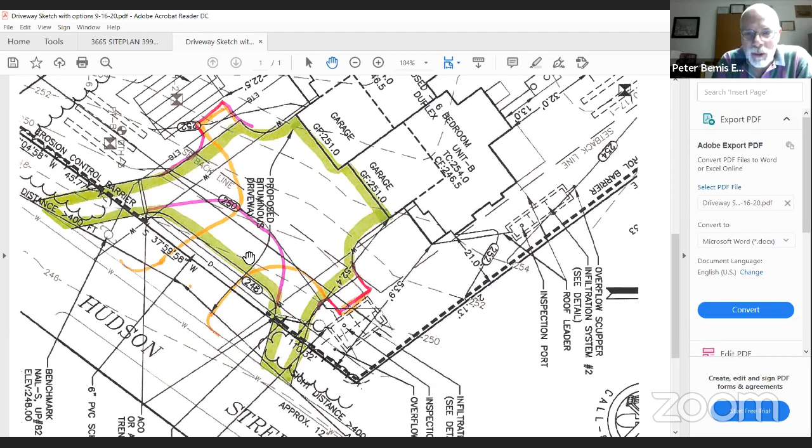We really don't have much to do as far as landscape on this project. Again, if I had known I had to do something detailed I would have, but this builder will do a very nice job. Actually with a circular driveway, it gives a great opportunity to do something in that front pocket. I just think it screams for some landscaping through there. I can assure you, you'll drive by and be impressed with this project.

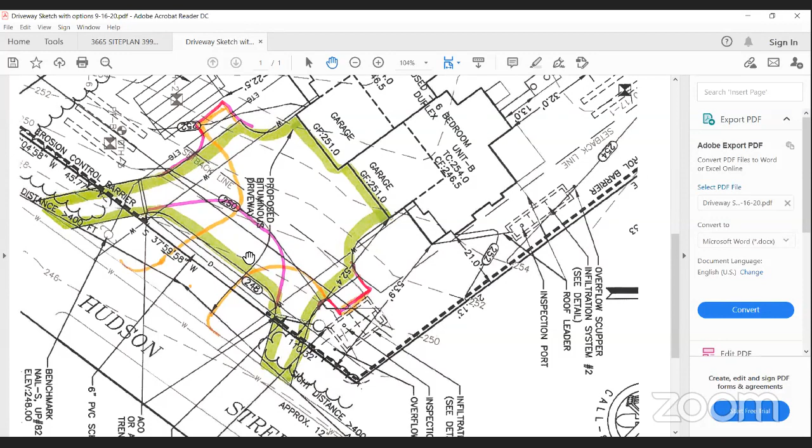Okay, thank you. All right, Kathy, I think we're all set with this applicant. Good luck and congratulations, you're now moving on to the ZBA and the planning board. Thank you very much. Have a good evening. You're welcome.